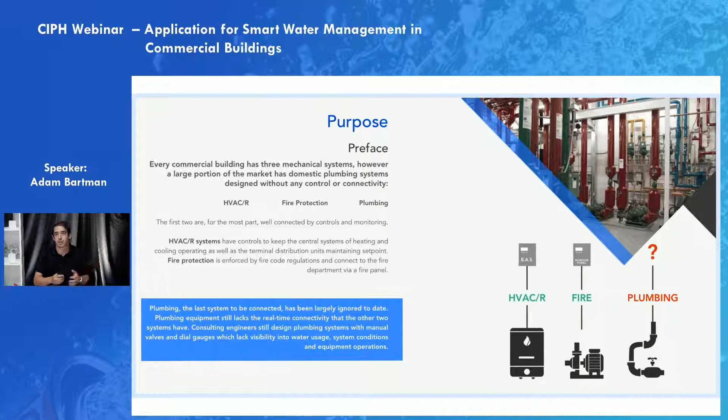Next in line is, again, the fire suppression system. Just naturally, due to regulations, those are always connected and monitored, with the fire department, etc. But when we look at the domestic systems, time and time again, we find there is no relevant platform to make any kind of connectivity when it's imperative that building owners have information on consumption, pressures, temperature, and flow rates to make sure that their systems are functioning properly. And so we'll take a look at the specific portion of the market that's struggling with this item, and then some of the ways it can be elevated into a better arrangement.

So the real takeaway from today, following these three segments, would be to be able to explain some of the challenges that building owners face, some of the conditions they're experiencing, primarily because these domestic plumbing systems are unconnected. To then understand how an IoT technology or solution can be applied here to really push forward the current domestic plumbing design strategies or standards. And then lastly, be able to recommend real life applications or solutions that will really provide building owners a ton of value, really optimize the properties, and step into the direction we're heading anyways when it comes to smarter and more optimized commercial properties.

So as we go through this, you'll notice some of the text is a bit small. I wouldn't worry too much about reading into the details. As our hosts have mentioned, we'll share a recording and the actual document itself. I would just pay more attention to some of the headlines, and then of course I'm going to go over all of the items one by one.

And so for section one, it's really about exploring what technologies are available and specifically which markets are really underserved. And so we've come to this term of the mid-market. If you lay out all the different asset types in a very simple linear format, on one end of the spectrum, you're going to have single-family home. In the last 5 or 6 years, we've all seen smart home technology really take off from some of the giant tech companies. And so we see today that, particularly when it comes to water and conservation and leak detection, the single-family home market is very well served. There's a number of vendors and providers that have focused their equipment and technology for the single-family home market.

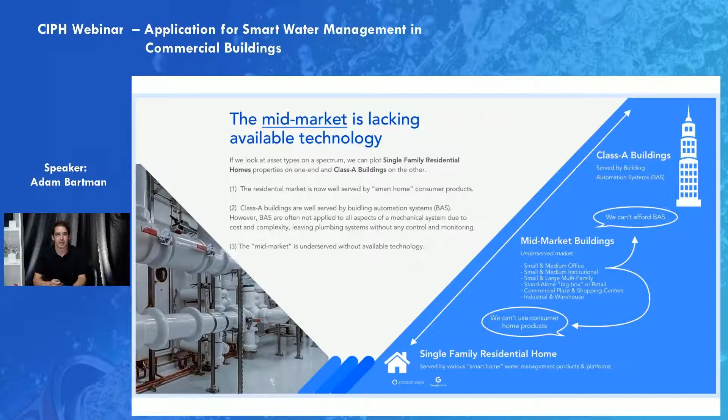Where we really focus, and where the general presentation today is going to focus, is again on this mid-market, and that's really everything between those two. Again, a very underserved market. That's everything from a big box store, freestanding building, all the way to a 50, 60-story multifamily building, and everything in between that are really struggling with some of the operating conditions post-construction that ultimately degrade the plumbing system and therefore the building, and creates a very uncomfortable environment for the building owners and the occupants.

And so some of the questions that we ask ourselves intuitively, the first here obviously being, what are they trying to solve? What challenges are they having? And so when we speak to clients in our market, they're typically trying to solve one of these three things, at least, sometimes all of them, but it's been kind of well categorized into these three buckets. And so the primary things that we see building owners trying to solve, their need, so to speak, is improving the day-to-day workflow.

So if you imagine in a larger commercial building, mid-size office building, water shutdowns are pretty frequent, and a lot of the service providers that service these buildings are really struggling to find shut-off valves, find valves that work because things haven't been exercised, having challenges around bad storage temperatures, too high of flow rates. And so a lot of this stuff could just be made much more seamless if they just had a bit of information data and then the ability to control autonomously these conditions.

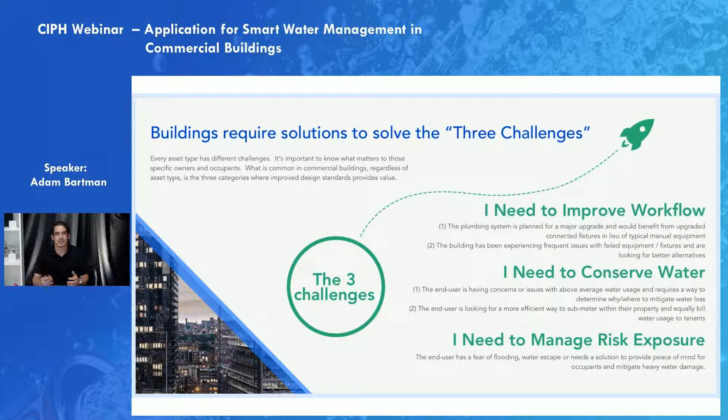And so having something simple like the ability to remotely close a valve quickly and obviously off-site could really mitigate the exposure for a lot of these building owners, avoid the tenant disruption and all those scenarios that come with. So these are typically the three things that building owners are really trying to solve.

A little more specifically and more into some of the design standards. Again, I spent about 15 years in the plumbing industry, owning and operating a service company for commercial buildings, and day in and day out, we see building owners struggling with system conditions, temperatures too high, flow rates too high, pinholes, leaks, and all the stuff that comes with. And it's frustrating for service providers to know that these are typically simple things to fix, but without any kind of data, information, visibility into conditions, of course, they're just going to go unnoticed.

And so, I've thrown up 10 items that were quite prevalent in our client base. Certainly not limited to just the 10, but in certain buildings that have pressure reducing valves, they malfunction. You begin to get imbalanced pressures and temperature delivery. I've seen a number of times storage tanks where the hot water is being stored far too low, at 120 Fahrenheit, and then you have the risk of Legionella.

And there's so many things that just happen, again, due to these unconnected or really unmanaged domestic plumbing systems. And this whole presentation is really to try and push the storyline forward on improving these basic controls in a building, much like you have seen on the HVAC side, just to have a relevant platform to provide the same kind of value.

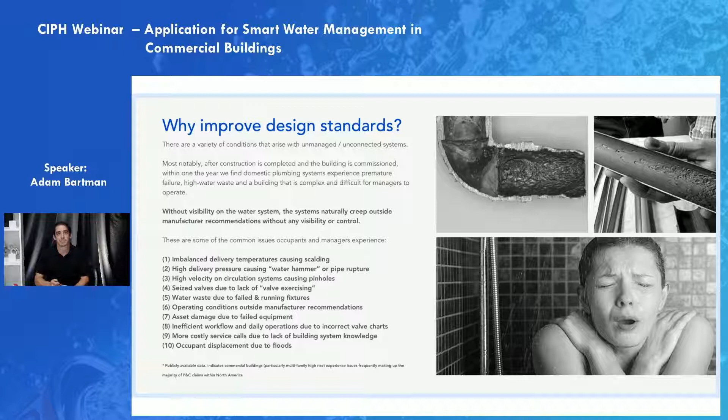Now, another question that tends to come up quite frequently, either from a client or from the designers, the engineers, is when's the right time to recommend or implement some kind of new technology into a building. And so we've kind of categorized it into three times that these can be implemented. Of course, in a new construction environment, it's going to be quite easy. It would just be embedded into the design drawings, either a small application or a wide application.

What's nice in the new construction environment is that the labor is really neutral. I mean, to have an example here, a manual shutoff valve on a domestic system, or an electric, actuated shutoff valve on the domestic system, at the end of the day, a valve's a valve, so the labor doesn't really change. All you're really paying, or the client is paying more for, is the control application or equipment that would be used to operate the valve, of course.

And nowadays, with the reduction in technology costs, our phones are so powerful, they should probably cost $1 million, and of course they don't. And so that small delta in cost difference is very quickly made up for in some clever ROI calculations, improvement to workflow, conservation of water. I mean, these things are very easy to justify. And so again, in a new construction environment, very easy to build out any kind of connected system.

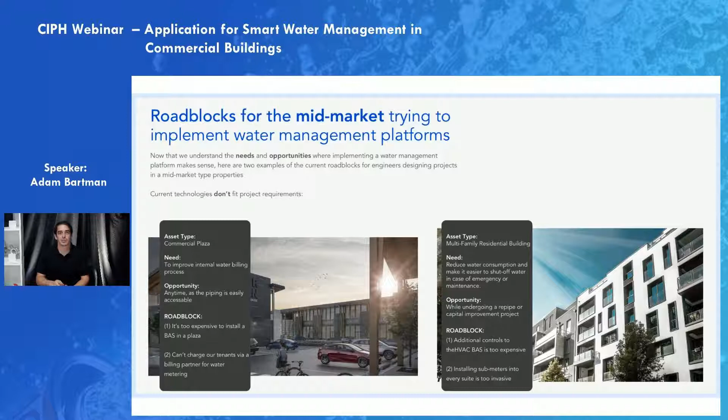With the plumbing company I had operated in my previous career, we operated in say 300 or 400 different buildings. High-rise service was our specialty, and we saw no connectivity. The majority of these buildings were 1960s, 70s, 80s. The Toronto market is a more mature urban environment, and there's just no kind of control or connectivity here. And as I mentioned, I believe it's primarily due to the costs associated with some of these BAS. They just wouldn't show up in an asset of this type.

So that kind of concludes section 1. That's really about looking at the market, identifying the underserved market. Section 2 here now is trying to get a better look at, okay, we know the issue, how do we solve it, and what can be done to provide more value to these building owners.

So if we dive a little deeper now into the 2 roadblocks or the current options that we're seeing, which play on some of the earlier slides. As I mentioned, we're going to see consumer products that were really part of the smart home ecosystem. They're built and designed from the technology to the apps for a home. Single, 3/4, 1-inch line coming into a house, very controllable environment. There's no cooling towers, there's no boilers. They may have a small hot water tank, a furnace, maybe a little boiler for a hydronic system, but fairly simple and straightforward domestic systems.

The challenge about taking the consumer product into the mid-market is that, again, the consumer products are really a single point use. There isn't multiple shutoff valves, there isn't multiple sensors, there isn't that scalability, and most of the products we see are really around leak detection, which, as you can see just from the 2 examples earlier, a lot of people in the mid-market, commercial market in general, of course they care about leaks and nobody wants a disaster, but it's certainly not top of mind for projects and solutions that they're looking for. And so, that's the main reason why those products and solutions don't play into the mid-market.

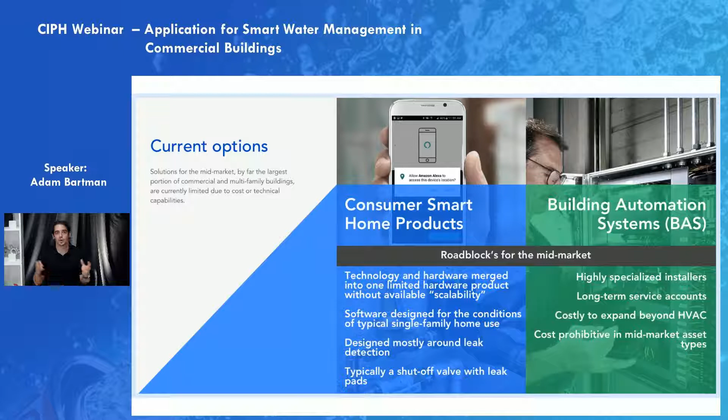And so again, we used to see clients that they may have sort of a light version of a BAS controlling some of the HVAC elements, but are just petrified to call in the contractor to make any changes to it due to the cost that they incur to have a service provider out there. And so these are really highlighting the reasons why they're not making their way into this mid-market.

And so the obvious next question is, so then what does a perfect solution need to look like? And so we've kind of fragmented this into 4 sections, each of them equally as important as the other, because they all just play into what the arrangement needs to look like to actually provide some relative value. And so number 1, of course, as I've mentioned a number of times now, a low-cost hardware solution is an absolute must. Again, it's quite easy to find nowadays with the reduction in technology costs. It's exponentially being reduced. And so just having something that's not only low cost upfront, but as I mentioned earlier, low cost on an ongoing basis.

And that's simply achieved by empowering the entire community of service providers to be able to manage and deal with this equipment. It doesn't have to be super specialized and take 1,000 hours of training to get onboarded on how to implement this. And so that would unlock the requirement for this market. Number 2, as I've touched on, it needs to be scalable. When we implement designs, they may be a small application for a huge building or a large application for that same building. And so having the flexibility to grow and shrink these applications is just again an absolute requirement when we're designing stuff for clients looking for these solutions.

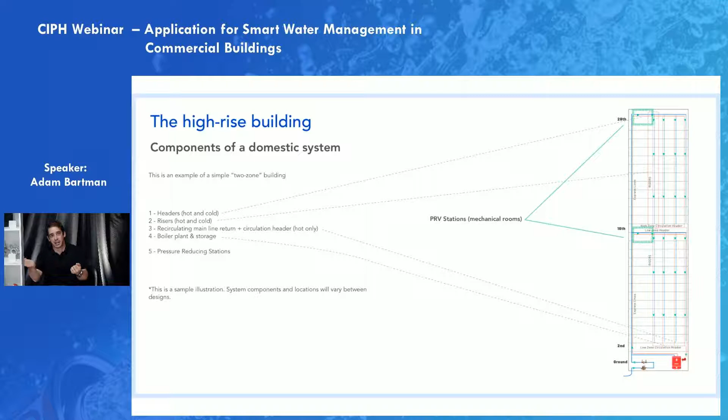And so the last section here, which hopefully provides the most value, is going to take a real deep dive into some of the applications in the domestic system. So if we look at all of the distribution piping that goes through a building, I'd like to take you on a journey from when water enters the building, how it's distributed into headers, down into the risers, how the hot water is then collected and recirculated back to the boiler plant, and then a few general areas, sump pumps, mechanical rooms, etc. And what we're really going to look at is one slide with the traditional design drawing, a lot of manually operated equipment, and then how the IoT equipment is overlaid on traditional, very good design, to really help elevate it into the next chapter.

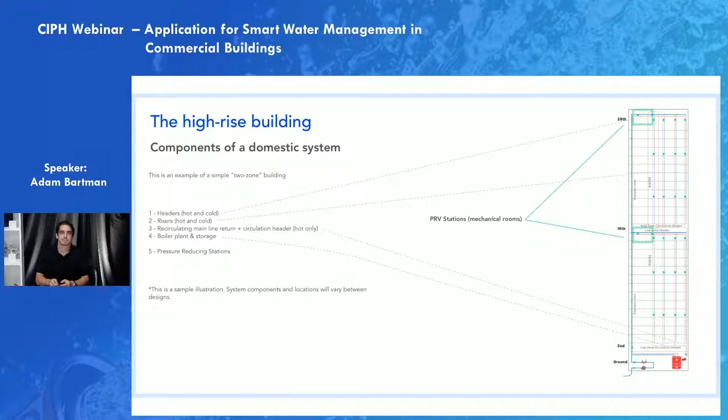So, of course, we start in the sprinkler room. We're going to have a main come in off the street. It'll traditionally go through a water meter or a bulk meter, house meter, as they say. It may or may not have a bypass around just for service. And this really belongs to the region or the city for their billing application. Now, downstream of that, the next device in line, in almost all regions now, we're seeing backflow prevention requirements becoming more and more strict, and we're thankful for that. That's a one-way valve to make sure that water enters the building and has no way of being back siphoned out to the street, causing contamination. And so that would be the immediate next device in line.

Next in line, in most commercial buildings that we see now, will be some kind of water quality product. It may be just a simple strainer. It may be a more sophisticated strainer, which is what's on the detail here, or it may even be softening equipment. There are some areas, of course, that will need to provide water softening equipment to make the water adequate for the building. And next in line would be a booster pump package.

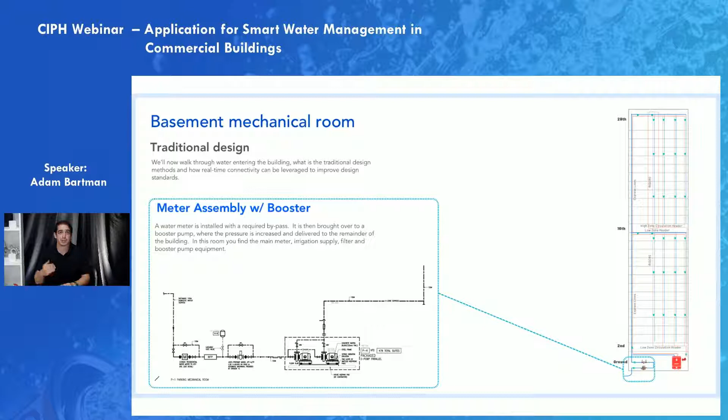And one thing I forgot to mention: on the right side here, I'm going to use this 28, 30-story building that has a low pressure zone and a high pressure zone to relate some of the applications, designs, and details. So just keep in mind, that's our example building. And so obviously in a building like this, we're going to have a booster pump. Simply, its purpose is to take probably 40 or 50 PSI off the street and pressurize it to adequately reach the upper areas of the building. You may need 150 pounds to actually reach the top floor here. And typically midway through, they have to reduce the pressure. And so we'll get into that.

But again, we look at traditional design. There's a manual meter. No one really knows what's going on. Building owners may get a water bill quarterly and analyze that based on last year's usage, very reactively making decisions on water waste and overall consumption and efficiency of the building. And so it's not a very good way of looking at water consumption in real time, if they're even doing that.

There's obviously a lot of stuff going on in the building, and looking at water consumption probably falls a bit short on their list of things to do. So having the main meter actually connected, recording in real time the consumption, would allow a building owner in real time to more proactively make decisions on, maybe we want to upgrade our toilets or replace flush valves to more efficient ones. And so having that information dashboard recorded is incredibly valuable in these commercial buildings.

The next item in line will be the Backflow Preventer. Now, the two things that I usually implement in a design would be to have one of the valves actuated. That would allow a building owner to just shut down the entire building if something catastrophic happened. Of course, in a 28-story building, you'd probably want a few more valves down in the line, so you don't have to shut the entire place down. But a very low-cost, high-value item. It's really a panic button to have in place just in case.

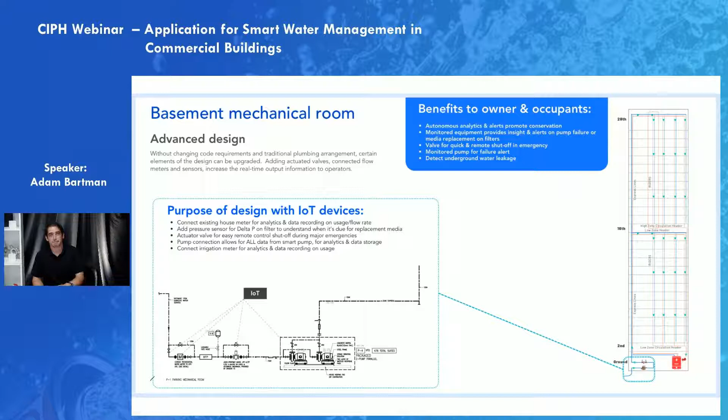So next in line, we've looked at when water enters the building. As I mentioned in our example, that booster pump downstairs needs to deliver, for example, I'll make up a number, 150 PSI to reach the top floor adequately. And so that's fine. It loses pressure by gravity, hits the top floor header, and then distributes beautifully to the upper half of the building. For the lower half of the building, having 150 out of a pump and maybe 130 by the time it reaches that upper header on the low zone is still too much.

And so it's a very common design that we see nowadays, where they'll just simply reduce the pressure with a pressure reducing valve. You can think of it as a transformer for those that are comfortable with electrical. We're just taking a high pressure, changing it to a low pressure, converting a voltage, so to speak, and then distributing it at the correct pressure into that zone. In our case here, zone 1, we'll call it. And then you're now prepared a hot and cold water supply at, say, 60 PSI to be adequately delivered to that low pressure zone.

Now, because you've lowered the pressure, you still need to recirculate hot water, and so you can't bring the hot water back to the main shared boiler plant because that's the high pressure side. And so typically they'll recirculate the hot water right back into this PRV closet or this mechanical room. And they reheat that water with a sidearm heater, a plate and frame, electrical. There's a number of different products out there. But the idea is you supply 125 Fahrenheit water, it distributes through the risers, hot water is recollected and placed back into the supply line in this room, and again, as I mentioned, reheated. It creates that loop with a small circulator, and that's what you're seeing really on the detail here.

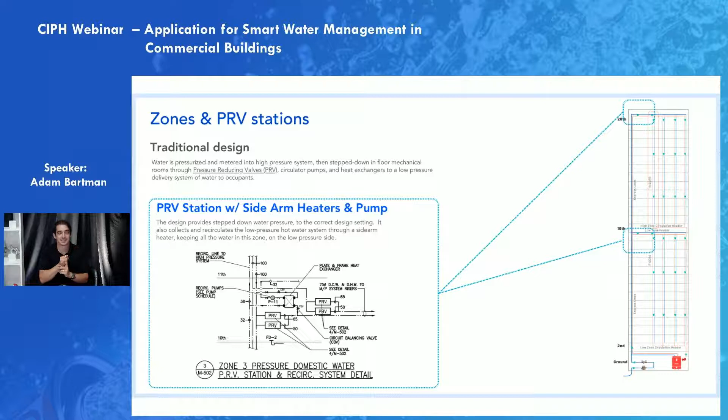So we have a hot water supply with 2 PRVs, a low flow and a high flow. Same exact thing on the cold water. And then simply for the hot water, we have a return line with a pump, hopefully a circuit balancing valve, and then it dumps back into the supply. And so again, it's really great design, looks really good on paper, but as we see in real life, these pressures and temperatures and flow rates just get all out of whack due to a lack of knowledge and a lack of maintenance. And so when we look at this, it's really an application of how do we manage, absorb information and control these conditions.

For me, these are absolutely paramount in a domestic plumbing system, particularly in larger buildings: monitoring pressure, temperature, and flow rate. If we can keep pressure, temperature, and flow rate at the required engineered design settings, these buildings will operate incredibly well. Their piping systems, whether it's copper or Aquarise or PEX-A or whatever products are out there nowadays, you don't have to be worried about anything, knowing that the pressure, temperature, and flow rates meet manufacturer recommendations.

And particularly for the engineering community, pushing boundaries and experimenting with new products is great, but they have the liability at the end of the day if system conditions are out of whack, and typically the developers are pointing the fingers at the engineer or contractor or manufacturers. And as I mentioned, time and time again, we're seeing these conditions are just brutally out of spec.

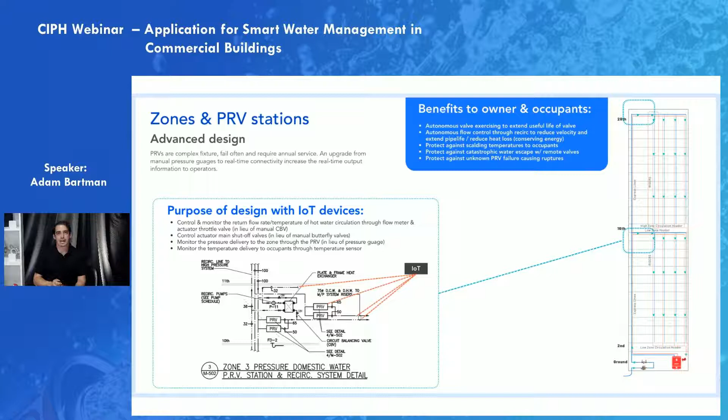So we've looked at water coming in off the street in the sprinkler room, goes up into an express, gets distributed for 2 halves of the building. The lower half goes through the pressure reducing valve station. And then in both zones, what happens, of course, is it goes through a horizontal distribution header, usually through a hallway, and then splits into its final risers that would serve vertically a number of suites or a number of office floor plates, however the configuration is. And that's sort of the next place that we look to elevate the design.

So when we look at, again, a simple detail, hot and cold supply lines, in this case coming from the bottom, feeding up, and the hot water would terminate to a recirculating valve.

Again, hopefully a CBV or some kind of control mechanism there to slow down the rate of water flow, not only at the main PRV station, but actually along independent lines. The line further away from the suction from the pump may draw less than the riser that's closer. And so there's often this exercise that happens post-construction during the commissioning where you would have to balance all of the circuits. Now, unfortunately, we find this almost never happens. Hopefully it does. But as I mentioned, even if it does, you can almost guarantee some plumbers walked in and tried to use it as a shut-off valve, and now the whole system's out of whack.

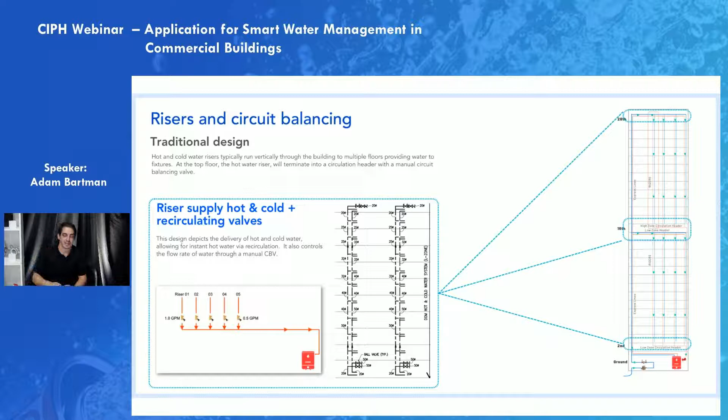So as we look into the connected side of things, no change to design, makes perfect sense. However, we just need a bit of information to what's going on along this riser. So there's two primary things to consider here. One, as I've mentioned a few times now, the actuated valve in lieu of the manual valve gives you the ability to shut down for simple service, for emergencies, but then you get the autonomous valve exercising that happens. It's a ton of value. You're just simply extending the useful life of the valve, probably by double.

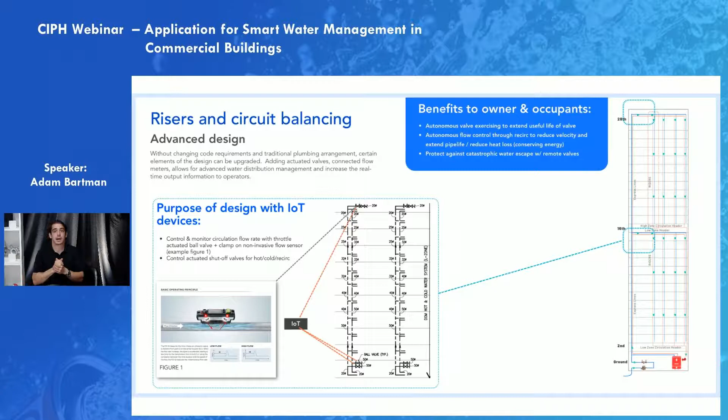And then the second item here would be to register how much hot water is flowing through the pipe or how much cold water is being used up by the highest using fixtures like toilets. And so, as I mentioned, there's some very simple, readily available clamp-on equipment. It's also become much more accessible with its lower costs. And so applying this begins to allow us to digitally understand and control and connect to these systems and ensure that all of the conditions are optimized.

Now, the last area in this sort of journey of distribution would be very similar to the PRV station, but up in the mechanical room, or this could be in the basement, this could be on the roof. Seeing a lot of the newer construction buildings are placing this up on the rooftops. And again, you'll see very light versions of some kind of controls, operating a pump to a boiler, just making sure those are speaking.

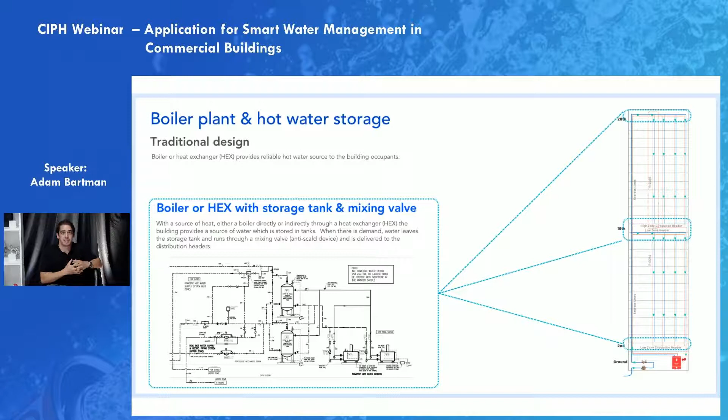But when it comes to the domestic side of things, I walked into a boiler room a few weeks ago, and the two thermometers, one on the storage tank, one after the mixing valve, both of them not functioning. And so no one has a clue what anything's being stored at or being delivered at, being recirculated through. There was no balancing valve. And so again, very simple sensors, readily available, pressure, temperature, flow rate. Apply those into these systems and just ensure that everything's operating at optimal conditions. And so that's what we look at when we look at the connected side.

How do we look at recirculated water back to the boiler plant? How do we look at mixing valves, hot, cold, and the tempered water outlet being delivered to the suites? Is that thing malfunctioned? Has it not been serviced in a couple years? And you may add some leak detection. Obviously, there's a lot of equipment going on here. And so these are some of the things to connect.

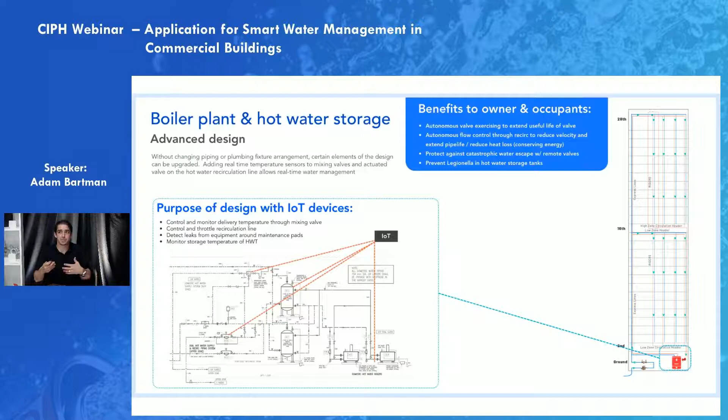Now, these are sort of more general aspects of the domestic system to make sure they're not forgotten. So we've looked at really the main distribution, but some of the other elements that are missed do bleed into the HVAC side. So an HVAC system is a closed loop system. You fill it with water, and it's that same water that just gets recirculated into suites, back to the cooling tower or heating boiler, whatever the case, and you're just moving that water around as efficiently as possible. There will always be a way to refill that system. They call it the makeup water supply or fresh water makeup.

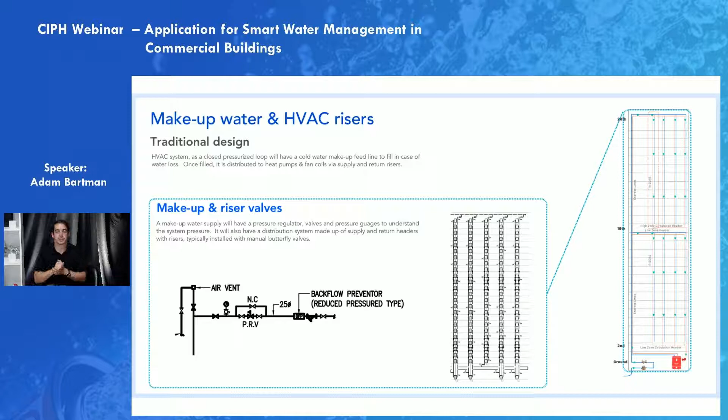And this is that typical detail here. So we'll see a couple shut-off valves, a pressure regulator to automatically fill the system to a certain pressure, or make up that water as it may be lost. And then, again, in most regions, you're going to have a backflow preventer because a lot of these systems are full of glycol or rust inhibitors. And so this is a straightforward freshwater makeup supply to a closed loop system. When we look at connectivity, for me, this is a really low cost, high value item, and I'll give you a few reasons why.

So what typically happens in a closed loop system, if it's functioning normally, there's no leaks, there's no shutdowns, nothing unusual is happening, there's really no water being introduced to the system in a substantial way. You might have point something of a cubic meter a day just naturally being lost, if even. But obviously, if the system's functioning normally, no water would be introduced to the system.

And so simply having a meter applied to this arrangement, which we're seeing more and more frequently, a manual, regular water meter, you would be able to, based on the IoT information, just create a very simple alert that says, if water consumption exceeds half a cubic meter, we probably have an issue. At least we can close it down. It may be a small leak.

We see fan coil units, like a vertical fan coil unit that has an A coil, water supply above a fan, but it's sitting above a condensate pan. And if one of those little copper tubes in that A coil has a small leak, you usually don't even see it. It just lands right into the condensate pan and out to the drain. The challenge is you're losing water, which isn't cheap. You're losing chemicals, which are awfully expensive.

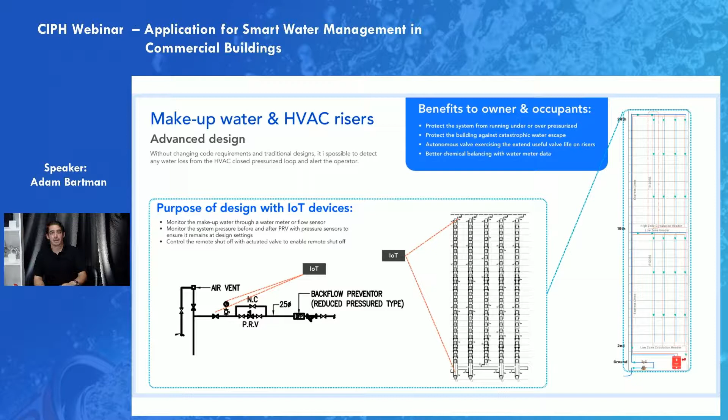Excuse me. And then the last thing on the HVAC side, similar to the domestic risers, you're going to have a supply return, which is the detail on the right here. And so we see always that these supply return lines are provided with a manual butterfly valve. And again, simply having an actuated valve versus a manual valve promotes a ton of value for building owners, primarily from just typical service and maintenance. But of course, if there was some kind of major leak, these type of leaks can be quite catastrophic. So having the connected valves there would be very important.

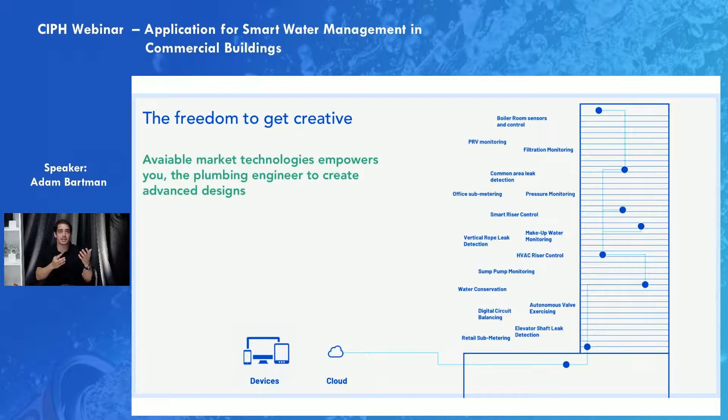And so that kind of sums up the high level look at how IoT is really elevating design standards, why we're big advocates of creating connectivity around domestic plumbing systems. And, as I mentioned in the earlier slides, at the end of the day, these solutions need to be open-ended and give service providers, solution providers, engineers, building owners the freedom to get creative. Everybody's got different problems, and we need a way to solve those issues.

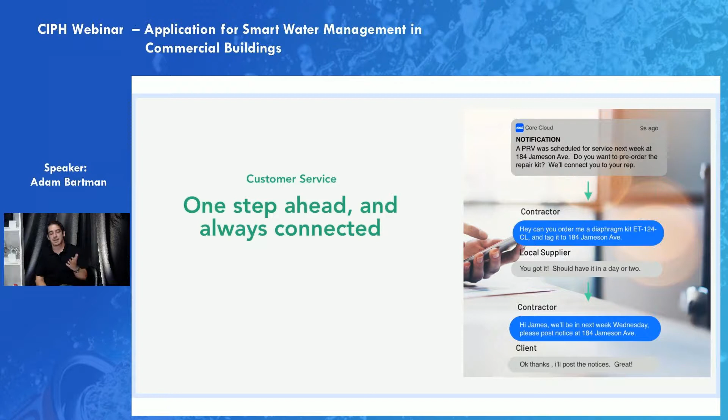If I could paint a beautiful picture of what this really should all look like, if there's an issue, it gets reported automatically. Parts are ordered from a supplier because we know which piece of equipment is deployed in the field. All of the coordination for shutting water could be done very seamlessly. And at the end of the day, it just promotes a much more efficient building, utilizing its resources much, much better.